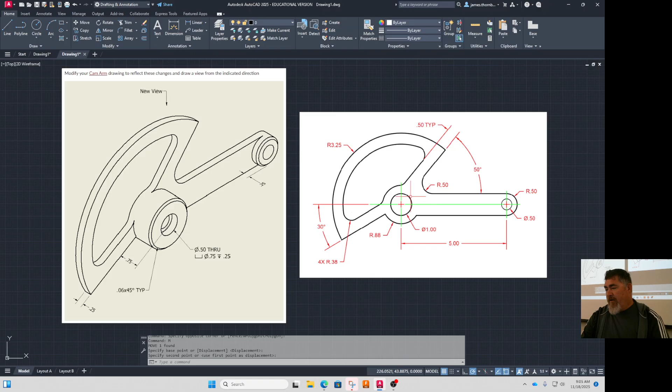So when you do this, make sure you make all those changes. Go back to this one, edit the circle. How can I edit that circle to make it the right size? So if it's a 1-inch diameter circle, how can I make that a diameter 3/4 circle?

I could scale it. That's an easy one, right? Because it's going from 1 to 3/4, it's just 3/4. What's another easier way to just directly change it? Yeah, go to properties, click on it, and then go to diameter and just say 0.75. That's probably the easiest way to do it.

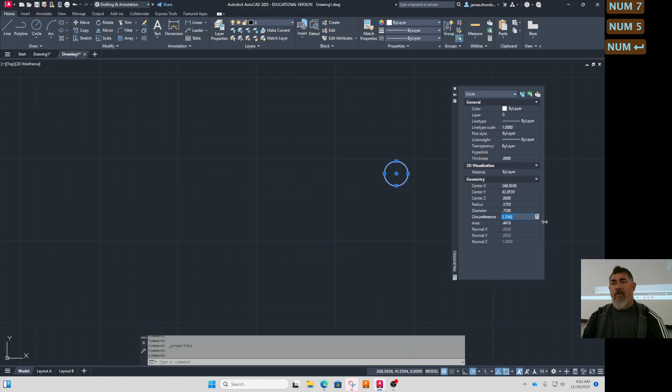And then I can just draw my 0.5 circle. Oops, not like that. What did I do wrong? Why did that one get big, not smaller? Yep, I need to tell diameter 0.5. Okay.

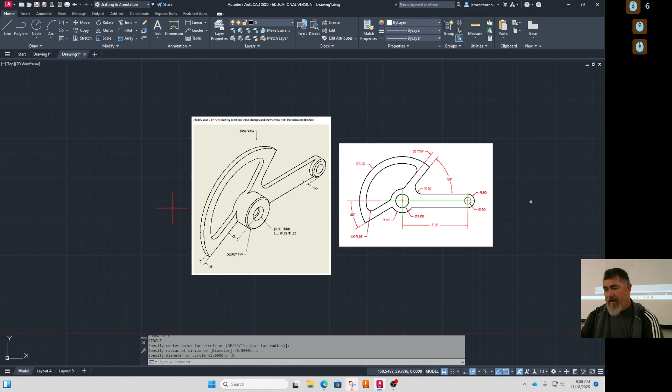So you make sure you do that. One common thing that happens is people give me something that looks like this - they get the chamfers, they do the heights here, they add the chamfers, but they forget to modify that hole. So don't forget that.

So that one, let's say, let's scale this to the right size. How can I make this the right size? Just so I can draw on top of it, I just put a picture in. How can I make sure that that's the right size? Because right now it looks like that's still the 1-inch hole.

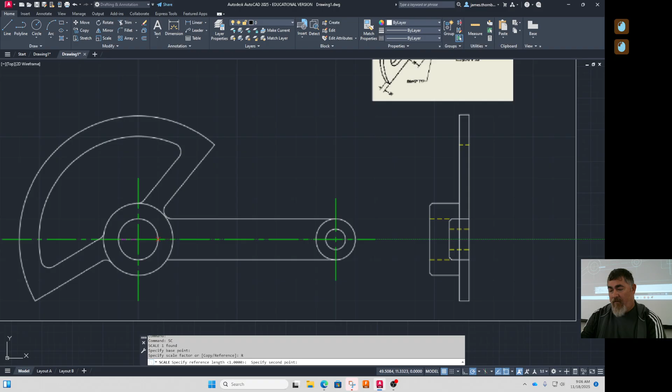Put option, reference. We'll go up there, tell that to be 1. So now if I draw a circle from there, from 5, oops. There's my 0.75. There's my 0.5, right? So this one right here would go away and just become that.

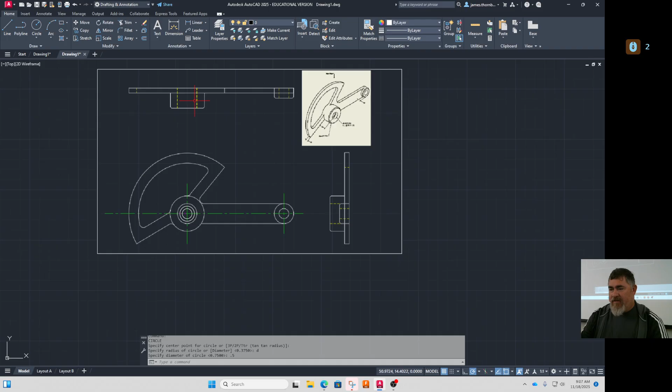But I'll do this off to the side so you can see what's going on. Is this going to change at all? Right here? Are those hidden lines going to change? Yeah, because they need to line up with this, right?

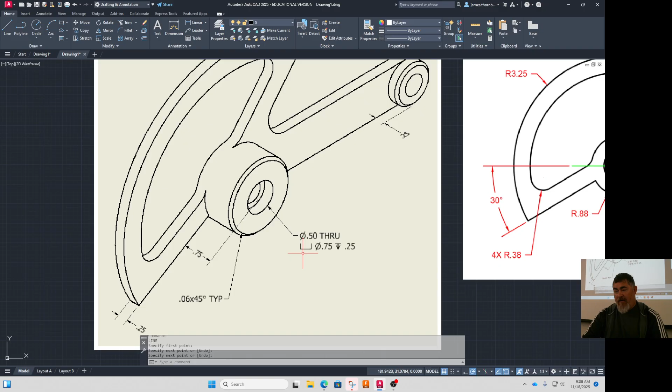Okay, let's take a look at that. So it is. So what's going on right here? What is a counterbore? Yeah, so it's a hole. The top section of the hole looks like this, and the bottom section of the hole is the thinner hole under there, right?

So if I draw a counterbore, let's say this is my material. I'm gonna have that. It's gonna come down. This is probably not centered, but it's gonna look like that when it goes through the part. It's gonna have this top section that's wide, this bottom section that's thin, right? Does that make sense?

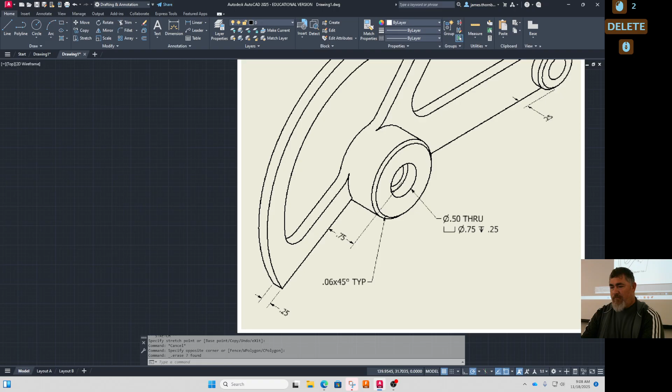So over here, I need to bring up those outer lines and maybe just move these in or retrim or whatever. I'm also going to have the thinner lines. Draw that line there. So I'll need to offset down. How deep is the countersink or counterbore? Quarter. So offset a quarter.

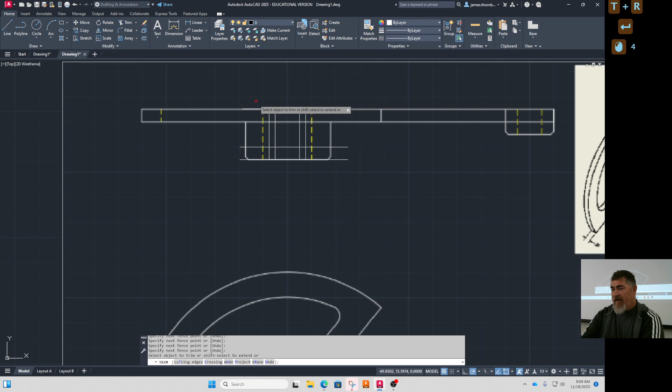Now that's all going to go away. That's all going to go away. So those are going to go away. And those are going to go away. And those are going to go away. Then all those are going to become our hidden lines.

Right, so these ones go away. I get just those ones that I just made. I don't know, so would this little middle line be there? Is there an edge there that goes in that middle section? Yeah.

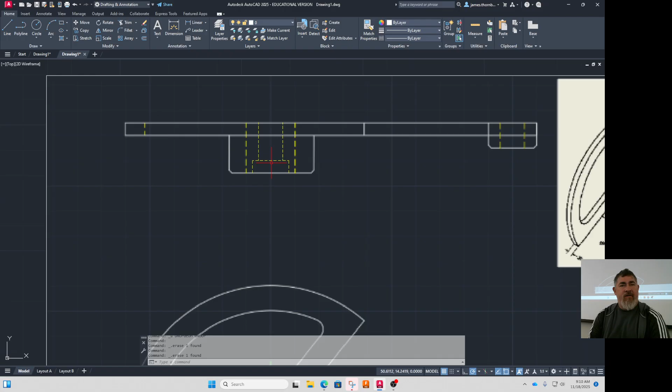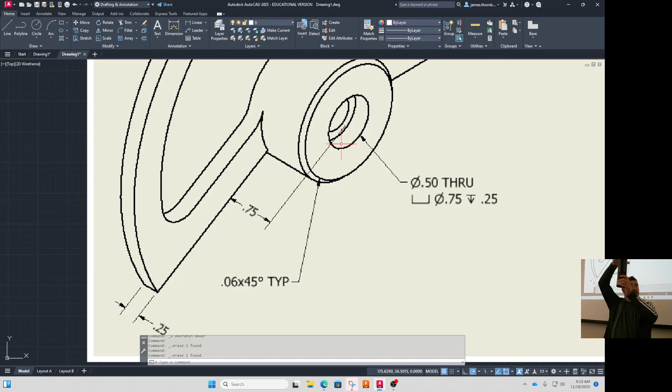Right, if we look here, this edge goes, so that middle line is the line in the middle of the hole, right? So this edge for the top of the hole goes all the way around. There's an edge that goes all the way around it, just like if it was a cylinder. If it was a cylinder, I'd still draw that line across the top, because there's still an edge going all the way around. Same thing.

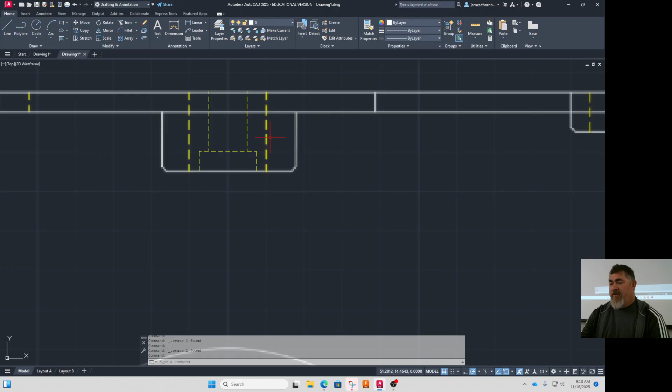And that's why it's in the symbol. The line goes all the way across the symbol because there's supposed to be a line there. So that top view of your counterbore should look like that, minus these big lines that were in the wrong spot, okay? So that fixes the counterbore in the top view. What about any other issues with this one?

Anything that hasn't been projected? Well, let's take a look at the right side. Yep, so let's take a look at that.

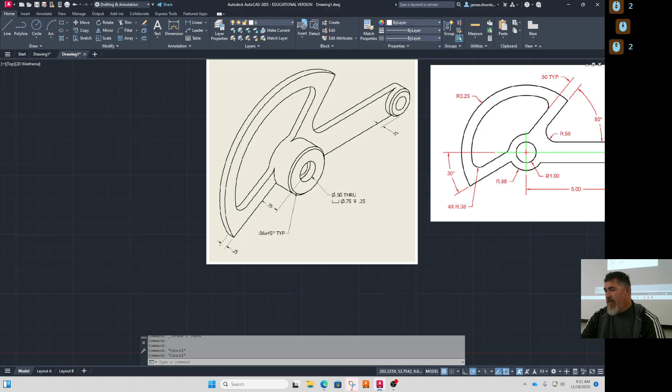So right now, this line right here, does it go the full length of the part? No. Does this line go the full length of the part? Yeah, because it goes here, then it wraps around to be on the end, right?

What about this line? What happens to it? It just stops right here, right? What's that point? How do we find that point right there?

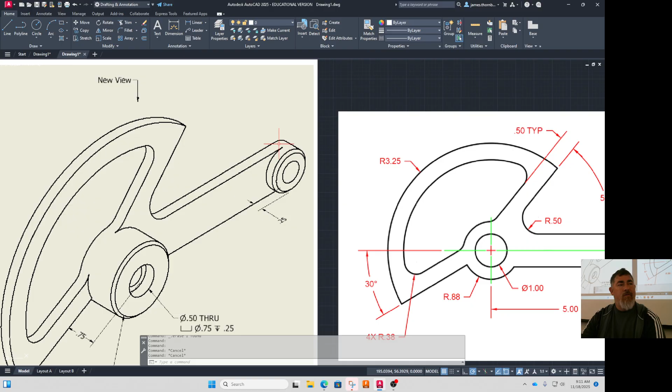We just draw, so here's that line, right? And it stops right there, because then it just becomes part of that face. So from here, on that center line, we can just project up. Use your OSNAP, so this line right here would stop where it intersects. Okay? Does that make sense?

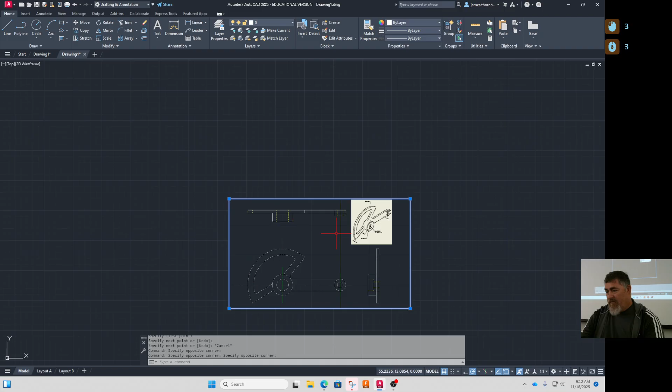Yep, so it'd be here and then stop there. This line is just construction, it would go away. So this line would just stop right there. Anything else that needs to be added to the front view?

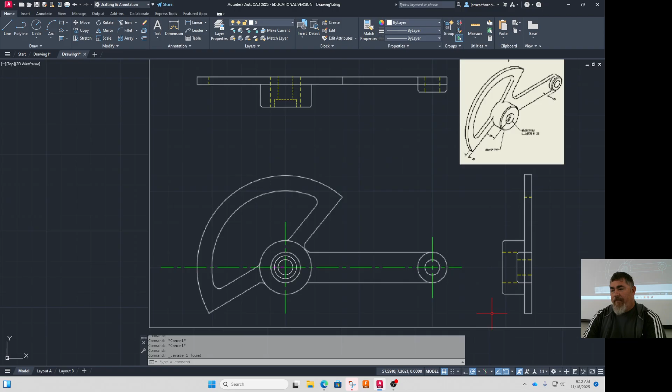Are there any corners in the top view that didn't get brought down to the front view? Remember, if there's a corner, it has to project. No? Your hole goes through it, so that's fine.

There probably should be a hidden line right here, from the quadrant of that circle. You already got the quadrant over here, but I mean from the top view going down. Anything else?

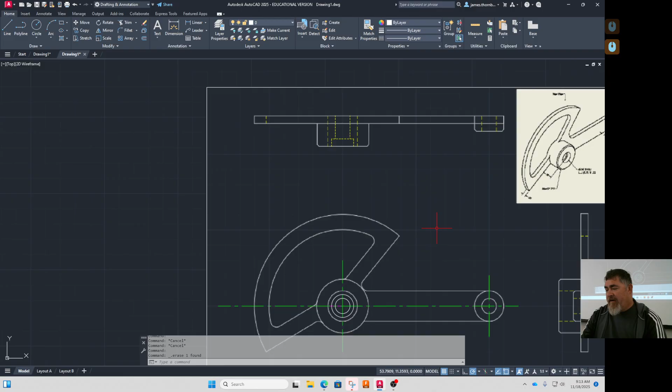I just realized this radius here, whoever did this, is too small. It shouldn't be touching on either of them.

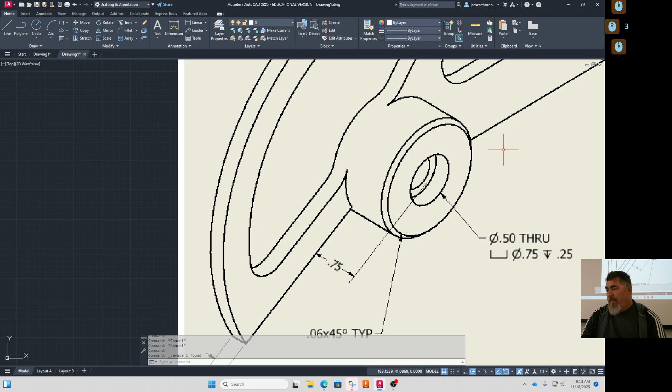But any corners in the top view that should come down, become a line. Or let's even just look here, how many circles are right here? How many different diameter circles are right there? Three.

How many different diameter circles are right there? Two. Where's the other one? What's the other one? The counterbore, or, right, the chamfer right there. So I didn't ask you for the side view, but he has it.

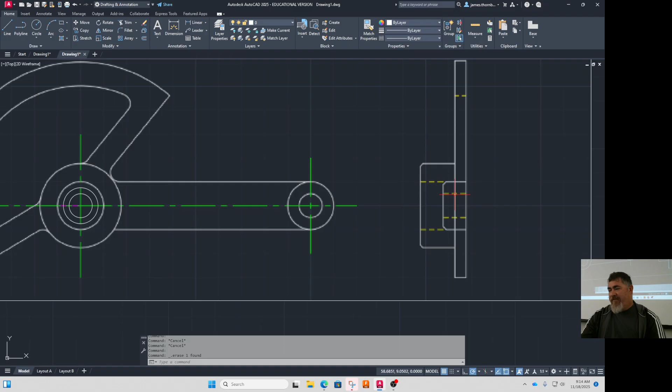But up here, this corner right there needs to come down. Now we draw a circle from the center of here to there. So use your same center as the other ones and just go to that point. Okay? Does that make sense?

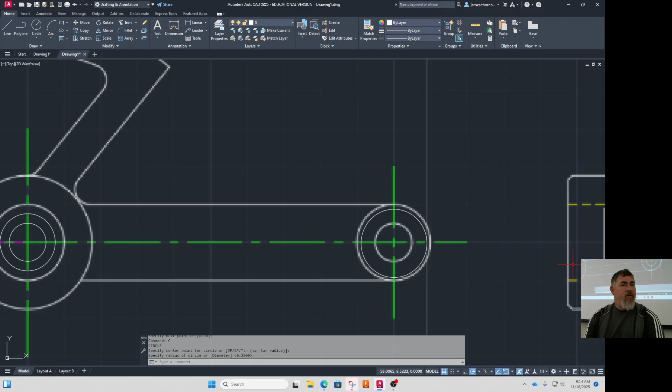So remember, every corner has to project to the next view. Things need to match between the views. Okay?